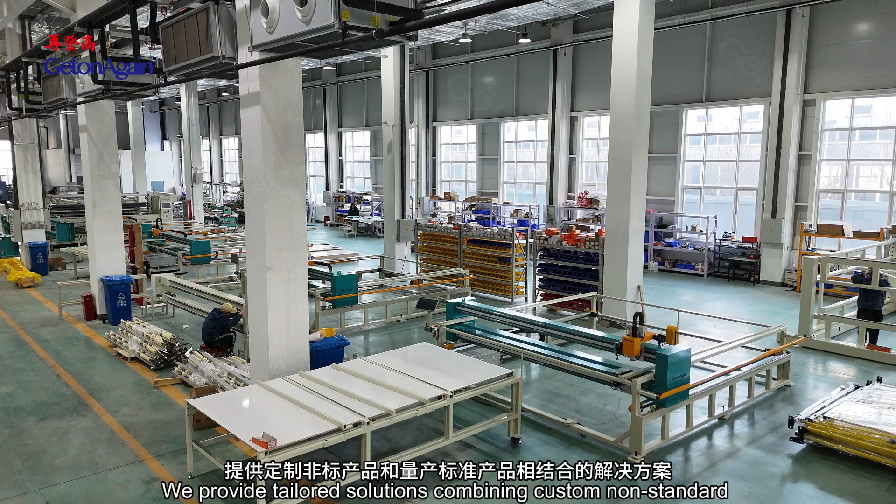We provide tailored solutions combining custom non-standard products with mass-produced standard products, including mechatronic machines, automated production lines, and intelligent factory solutions. Pattern room equipment includes magic inkjet plotter, 2 cartridge with maximum printing speed at 110 square meters per hour, 4 cartridge with maximum printing speed at 200 square meters per hour.

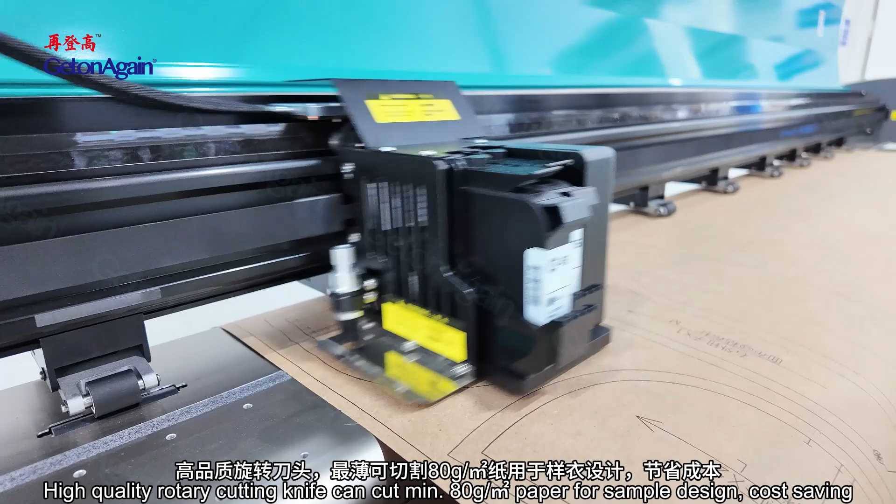Vertical inkjet cutting plotter, 1 machine multiple functions, pattern drawing with cutting, or standalone drawing. High-quality rotary cutting knife can cut minimum 80 grams per square meter paper for sample design, cost saving.

Flatbed inkjet cutting plotter, full speed map printing and cutting function, suitable for personalization, configured long knife or short knife, and optional fixed knife sleeve or elastic knife sleeve, suitable for cutting various materials.

Digitizer, easily reading paper patterns, convenient positioning, simple operation, accurately reading patterns, enable to speed up the design. It is a powerful tool for traditional manual drawing digitization.

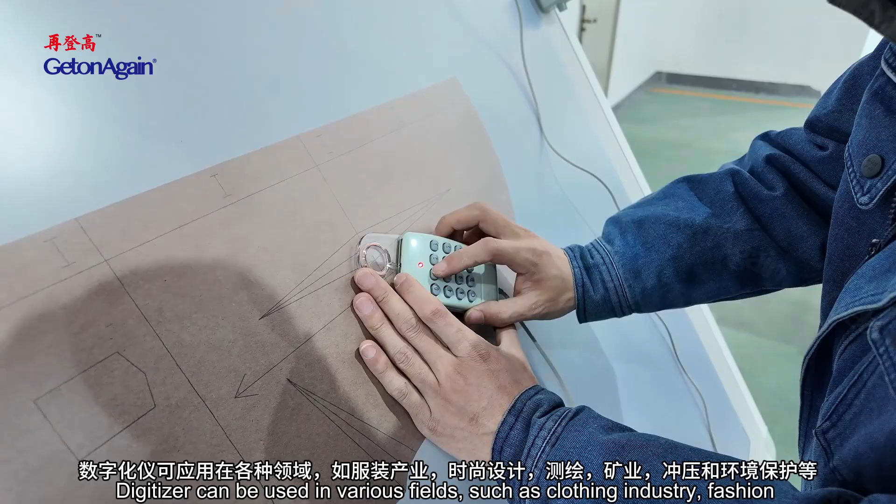Digitizer can be used in various fields, such as clothing industry, fashion design, surveying and mapping, mining, stamping and environmental protection, etc. Flatbed scanning digitizer, 1 button to start after placing scanning pieces, can vacuum absorption auto scanning auto transmission.

According to different models, support ultra-long width scanning, scanning speed up to 7,200 mm per minute, scanning resolution 150 to 300 dpi, high definition panoramic 1:1 image to ensure effective identification of various contours, notches, inner holes.

Cutting equipment includes automatic spreading machine, easily set the spreading method, length, speed, quantity and sections, with intuitive as well as simple operation. Dual use for both knit and woven fabrics, suitable for t-shirts, children's clothing, loungewear, and toy textiles.

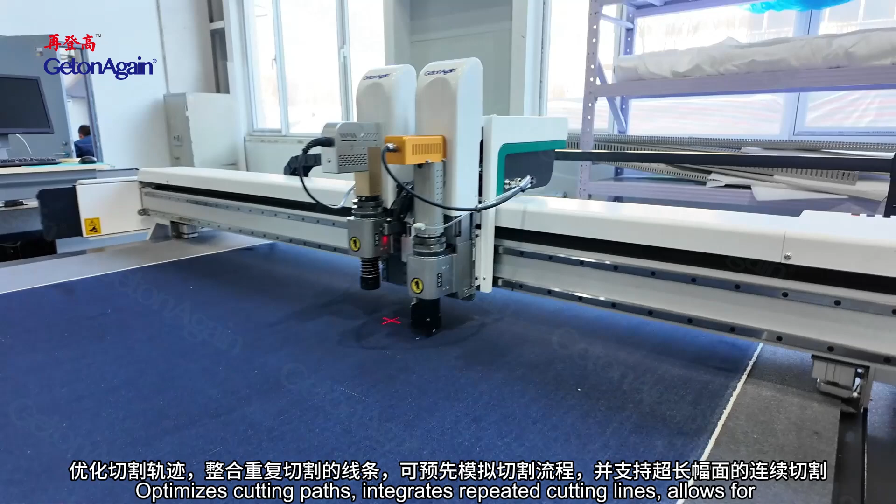Automatic single-layer cutting machine, no need to create specialized cutting molds. Cutting can be performed precisely by directly importing CAD design drawings into the equipment. Optimizes cutting paths, integrates repeated cutting lines, allows for pre-simulation of the cutting process, and supports continuous cutting for extra long materials.

Stripe and plaid matching cutting machine, equipped with a few HD industrial cameras, according to the capture size to perform intelligent combination. Ensure the high accuracy fabric images capturing.

Stripe and plaid matching auto cutter, equipped with double knives and pen draw punching working mode, special for various stripes and plaids fabric cutting in single ply.

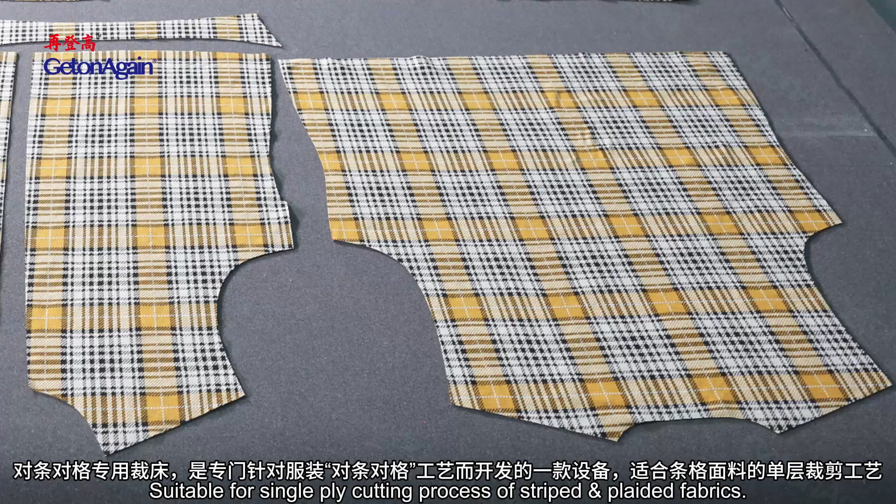High-end clothing customization: the effect of the alignment match stripe and plaid process has become the important measurement on the quality of this type of clothing. Stripe and plaid auto cutter is the equipment specially developed for this process to meet matching stripe and plaid clothing, suitable for single ply cutting process of striped and plaided fabrics.

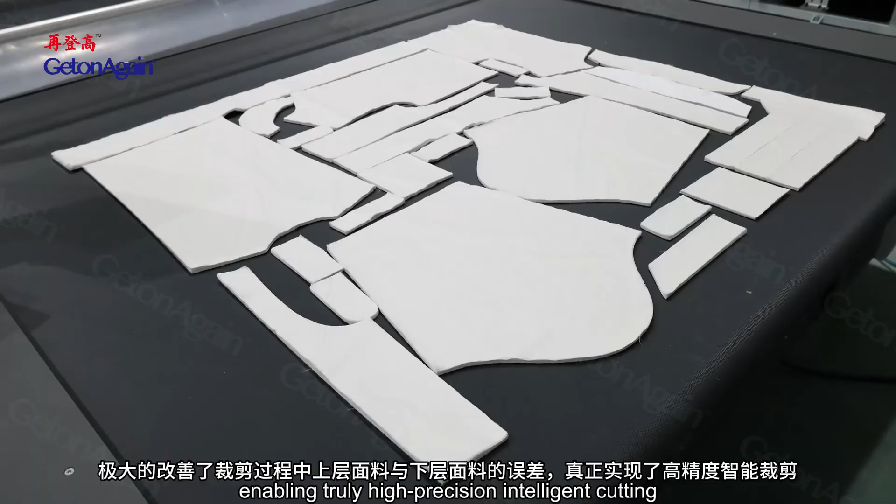Automatic multi-layer cutting machine, through the combination of micron-level intelligent sensing components and an intelligent control system, dynamic compensation and correction of cutter deformation during cutting operations are achieved, significantly reduces errors between the top and bottom layers of fabric during cutting, enabling truly high-precision intelligent cutting.

Computerized embroidery machine, high-speed embroidery with extremely low failure rates, long service life, low noise, and stable, reliable quality, equipped with an upper thread clamping device to prevent thread detachment and breakage, ensuring excellent embroidery results. Suitable for textile and garment manufacturing, footwear, hats, bags, home decoration, automotive interiors, and industrial products area.

Embroidery equipment includes Cloud Smart Teaching Embroidery Machine, suitable for integrated theoretical and practical teaching of computer embroidery in fields such as fashion and apparel design, clothing design and its engineering.

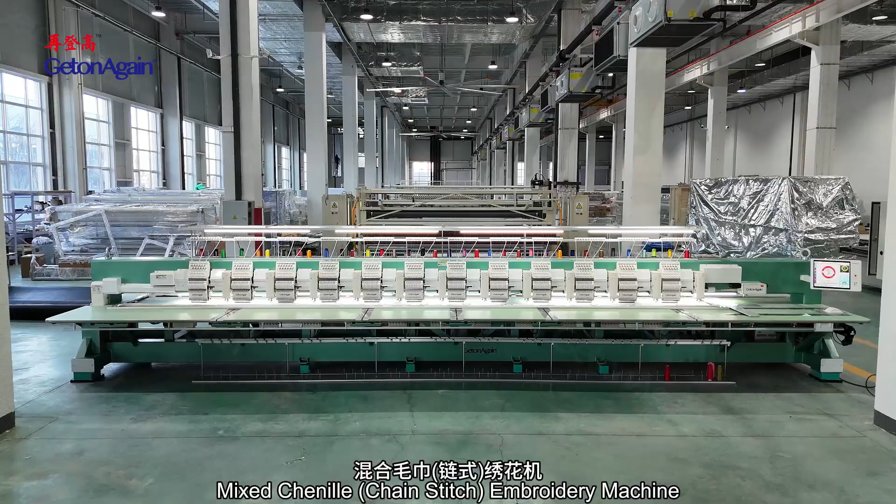Mixed chenille chain stitch embroidery machine, mixed embroidery feature, according to color sequence settings, switchable between chenille embroidery, flat embroidery, simplified operation. Chenille needle height can be adjusted for 10 levels according to chenille pile height or chain stitch thread thickness.

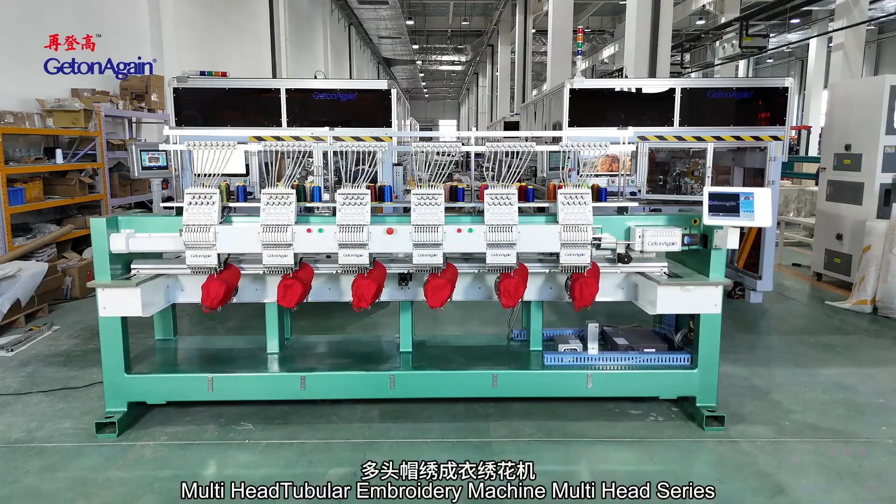Multifunctional embroidery on garment, shoes, caps, home textile, toys, bags and luggage, art craft, etc. Multi-head tubular embroidery machine multi-head series, suitable for embroidering on flat, caps, garments, shoes, belts, bags, etc.

Auto thread trimmers, auto color change, auto thread break detection, 270 degrees wide angle cap system, red light locating, LED lighting, precise head and drive system to ensure exquisite embroidery work.

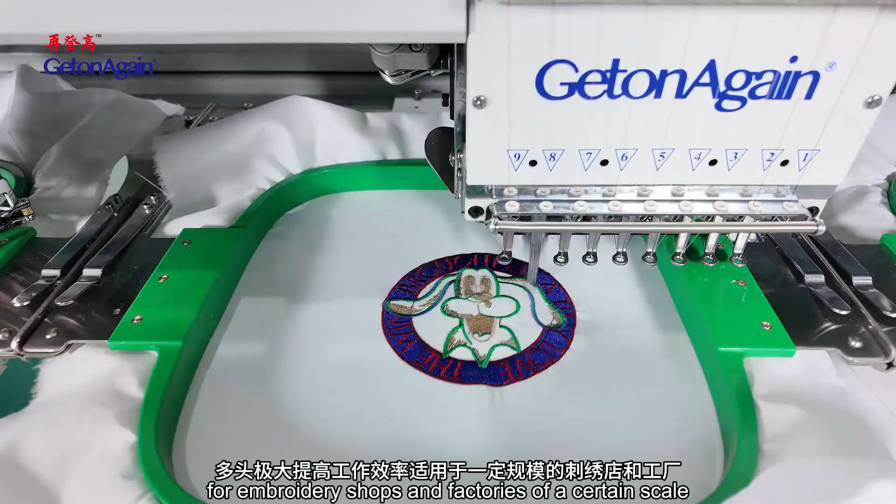Drop tables, easy to lift up and down. Multiple heads greatly improves work efficiency, suitable for embroidery shops and factories of a certain scale.

Computerized 5-in-1 embroidery machine, integrated 5 functions in one machine: flat embroidery, coiling, tape cording embroidery, chenille, chain stitch embroidery, double sequin device, laser cutting function, high precision, strong stereo sense, ideal artistic effect, suitable for embroidery of apparel, home textile, furniture, teaching, design and arts and crafts, etc.

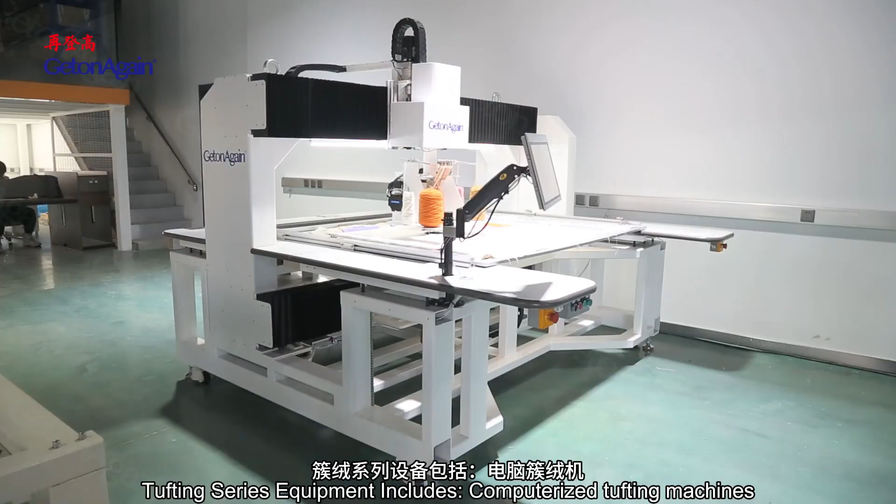Tufting series equipment includes computerized tufting machines with rotary tufting heads that work at any angle, avoiding positive-negative stitching differences, for higher efficiency and better tufting results. Suitable for various rugs, carpets, hanging carpets, tapestry, and other flooring decorative and home furnishing products tufting.

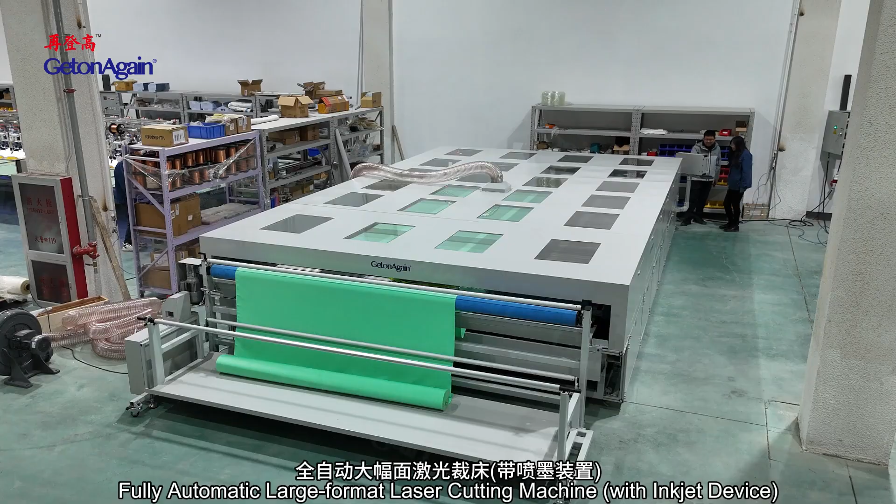Fully automatic large format laser cutting machine with inkjet device. Large format automatic feeding system designed to meet requirements for feeding and cutting whole rolls of fabric. Inkjet and cutting functions integrated for enhanced versatility. Applicable to industries such as custom clothing, single-piece cutting, sofas, toys, footwear and headwear, textile print pattern positioning cutting, automotive interiors, industrial filtration, and advertising, etc.

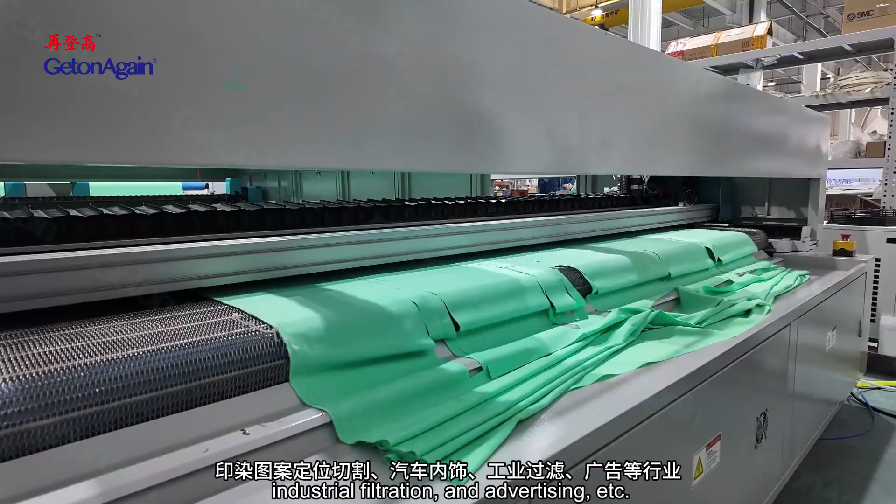Sewing equipment includes an automatic arbitrary rotary single needle leather sewing machine, suitable for automated leather pattern sewing in the fields of automotive interiors, car seat covers, car door panels, airplane seats, and leather furniture upholstery.

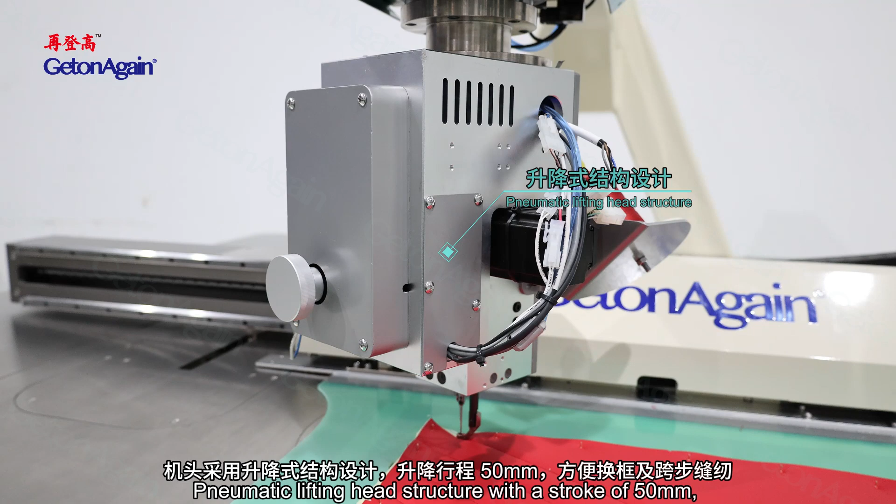Brand new integrated sewing head design with a simple and elegant overall appearance. 15-inch HD industrial touch control screen. Two sides workbenches designed with a flexible mechanism, reducing size after folding for easier transportation. Sewing head can rotate at any angle, avoiding differences between forward and reverse stitches, improving sewing efficiency and stitch quality. Pneumatic lifting head structure with a stroke of 50mm, making frame changes and span sewing more convenient.

The advantage of an independently driven presser foot system lies in its ability to control presser foot height through real-time pattern programming, effectively addressing uneven presser foot pressure issues when sewing materials of varying thicknesses. Newly upgraded triple lead screw drive for higher dynamic positioning accuracy. Max speed holds at 2,500 stitches per minute.

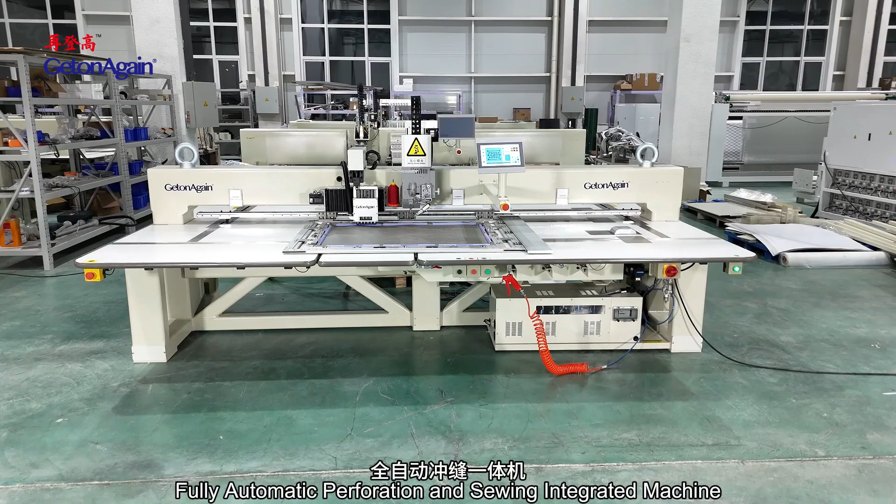Fully automatic perforation and sewing integrated machine. The punching machine head is specifically designed and developed for leather materials, equipped with various punching tool specifications. Sewing head up moving stroke is 50mm, providing sufficient space for material loading and easy operation. Suitable for perforation and sewing processes of various types and thicknesses of genuine leather and microfiber leather used in car seats, automotive interiors, aircraft seats, luggage, furniture, and more.

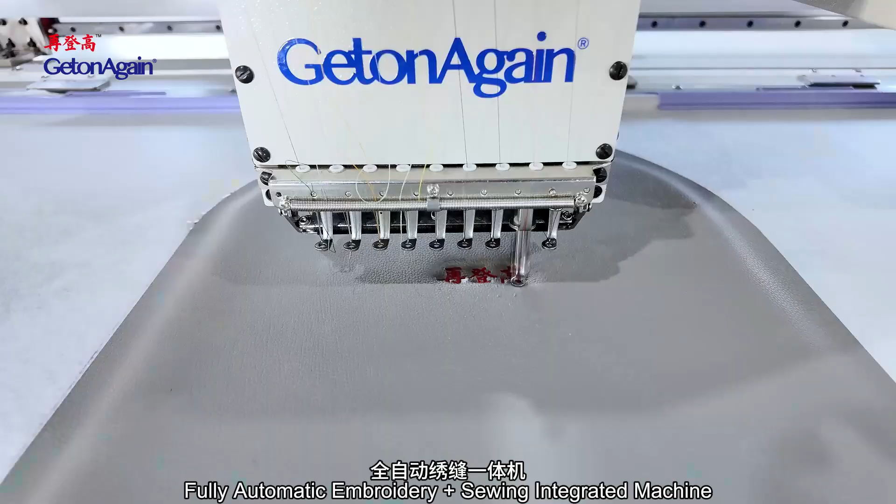Fully automatic embroidery and sewing integrated machine. 9-color embroidery machine head to meet the embroidery needs of different industries. The embroidery thread clamping mechanism incorporates a novel upper thread clamping assembly, effectively reducing thread breakage and slippage occurrences during operation. Specially designed sewing machine head for leather materials, producing beautiful stitching.

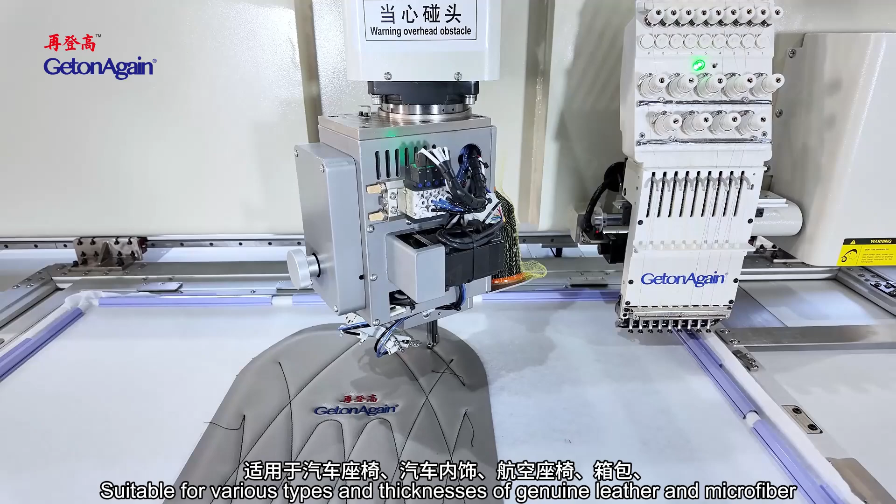Presser foot height is motor controlled and highly adjustable. Sewing machine head has an up-down moving stroke of 50mm, providing ample space for material loading and ease of operation. Suitable for various types and thicknesses of genuine leather and microfiber leather for automotive seats, car interiors, aviation seats, luggage, furniture, etc., combining embroidery and sewing processes.

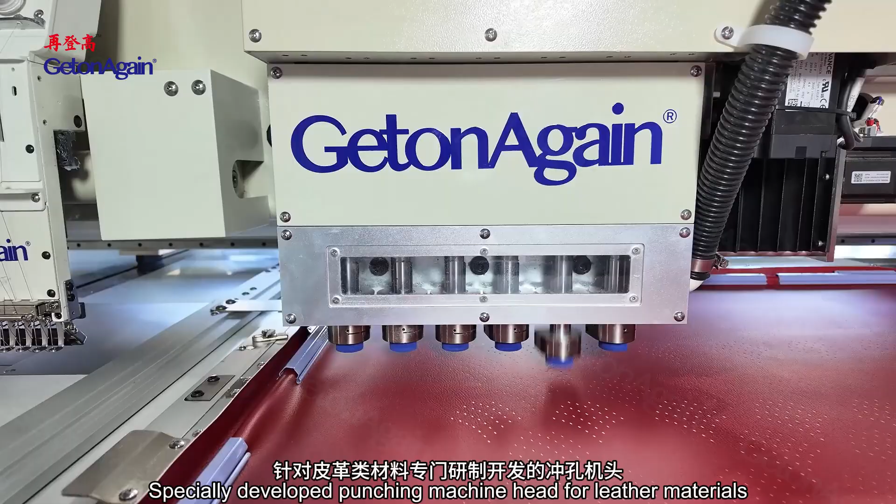Fully automatic perforation special hole and embroidery and sewing rotating head machine. Integrates punching, embroidery, and sewing into one machine, allowing for arbitrary pattern design and seamless combinations of punching, embroidery, and sewing for complex processes. Specially developed punching machine head for leather materials. The 9-color embroidery head meets the embroidery needs of various industries. Sewing machine head features an arbitrary rotation structure, creating beautiful stitching, reducing frame movement frequency, and improving efficiency.

Suitable for punching, embroidering, and sewing processes for various types and thicknesses of genuine leather and microfiber leather used in automotive seats, car interiors, aviation seats, luggage, and furniture, etc.

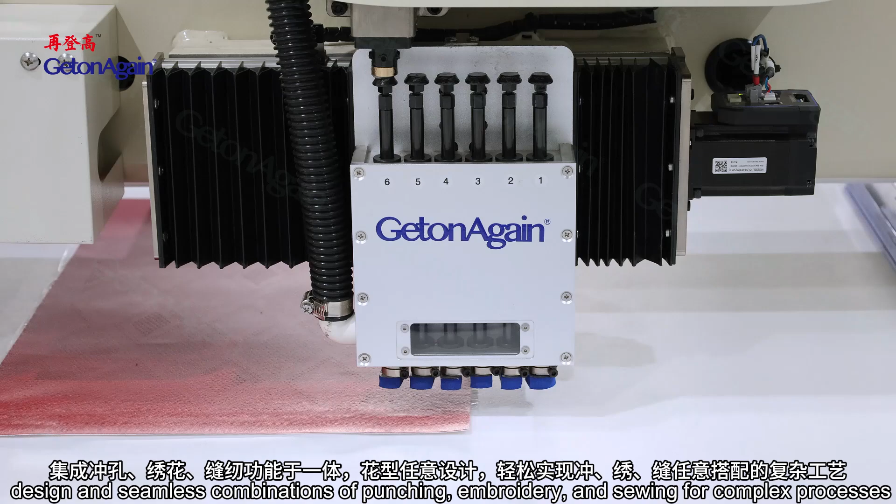Fully automatic perforation round hole embroidery sewing rotating head machine integrates punching, embroidery, and sewing into one machine, allowing for arbitrary pattern design and seamless combinations of punching, embroidery, and sewing for complex processes. The 9-color embroidery head meets the embroidery needs of various industries. Sewing machine head features an arbitrary rotation structure, creating beautiful stitching, reducing frame movement frequency, and improving efficiency.

Suitable for punching, embroidering, and sewing processes for various types and thicknesses of genuine leather and microfiber leather used in automotive seats, car interiors, aviation seats, luggage, and furniture, etc.

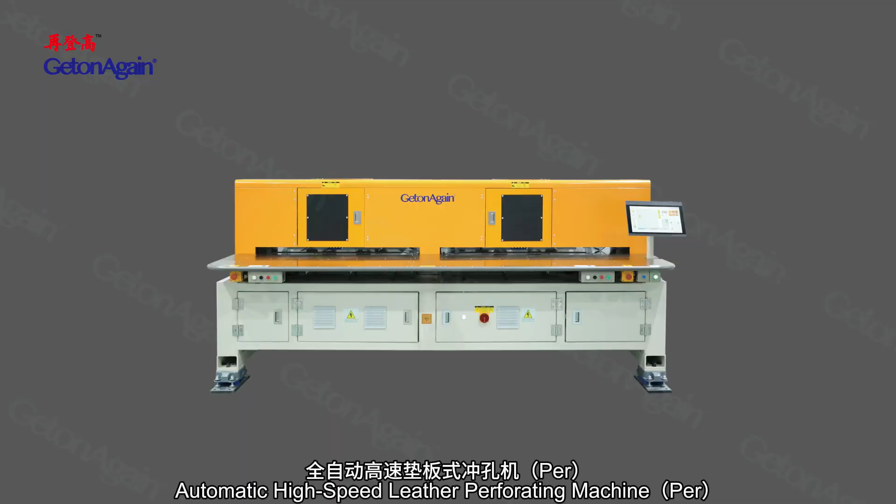Automatic high-speed leather perforating machine for punching processing of leather or microfiber leather with various types and different thickness, such as car seats, aviation seats, shoes, bags and furniture, etc. Full-scale 3-dimensional protective design ensures safer operation. The punch toolbox is heightened to prolong the punch tool's spring service life and reduce part wear.

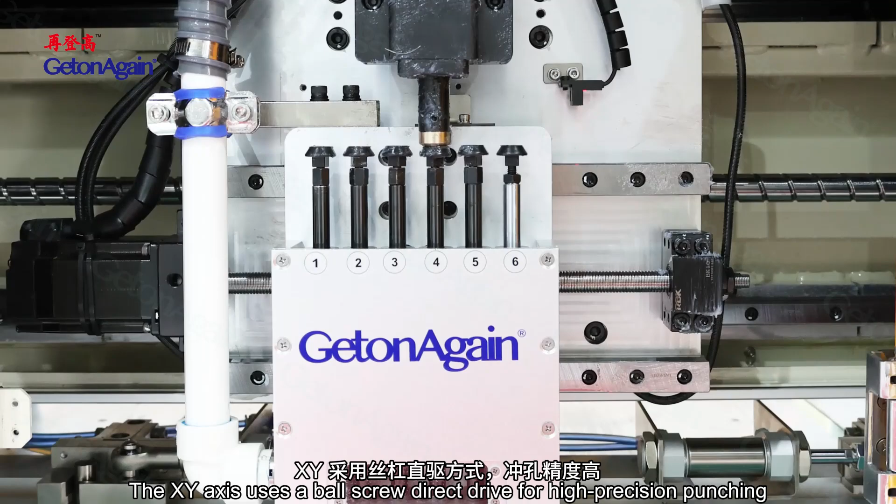The XY axis uses a ball screw direct drive for high-precision punching. The surface of key punching parts is strengthened to resist impact and fatigue, meeting the needs of high-intensity work. Single-head machines can make up to 2000 punches per minute, and double-head ones up to 4000.

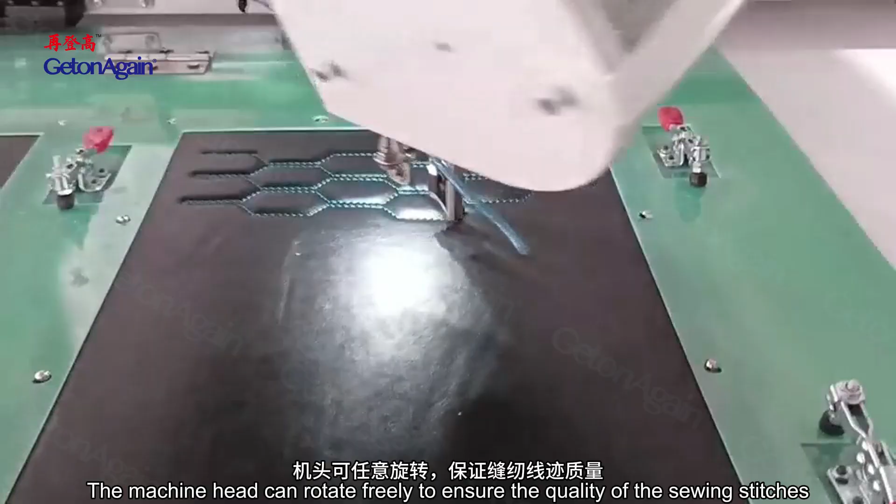Automatic template sewing machine, rotary head, for heavy material. Both the X and Y axis use a screw and slide transmission method, providing high precision and good stability. Suitable for pattern sewing on leather and heavy materials, such as car seats, sofas, massage chairs, boat interiors, and aircraft seats. The machine head can rotate freely to ensure the quality of the sewing stitches.

Automatic template sewing machine with double belt, double guide rail, double stepper motor structure. The machine head adopts oil-free lubrication, and the rotary shuttle adopts oil-line lubrication technology to completely eliminate fabric pollution. It identifies patterns through RFID barcodes and automatically switches to the corresponding sewing program for quick sewing. Used for template sewing processes such as opening pockets, notches, bag covers, and collar trimming.

Pattern sewing machine. This machine can easily sew 1200D thick thread with a thickness of 12 mm, features a 2 times large rotary hook, automatic thread trimming, and a maximum sewing speed of up to 2500 RPM.

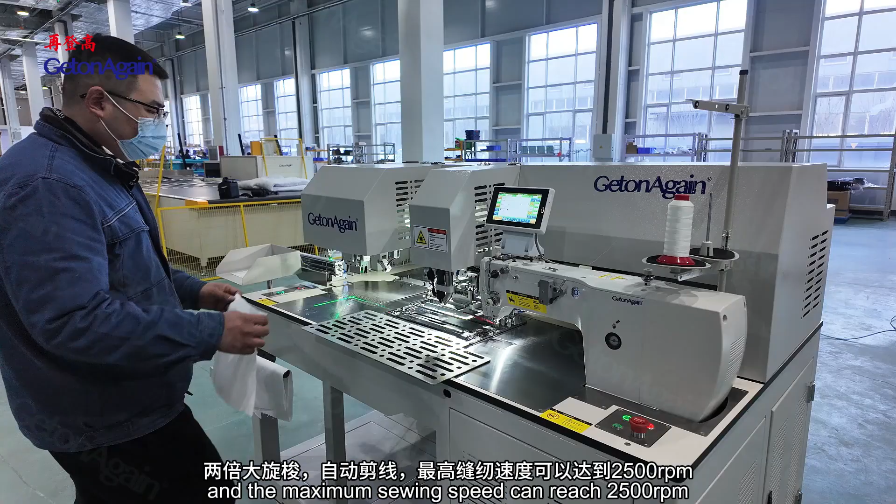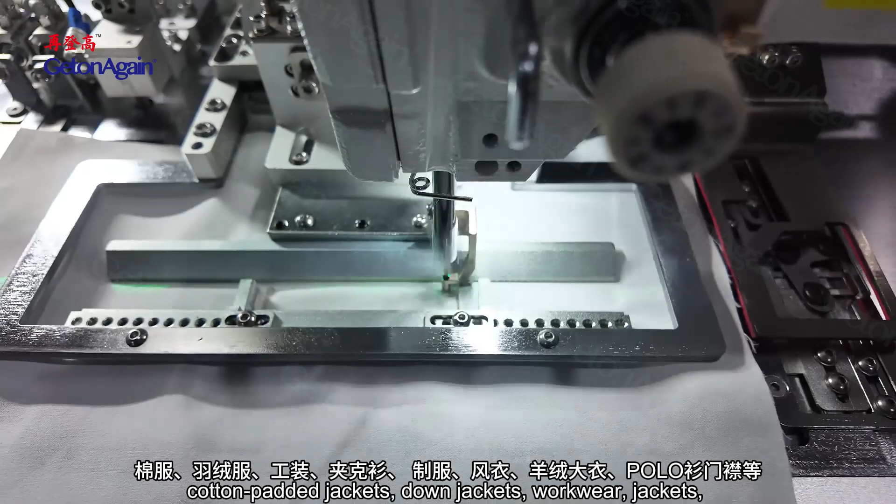Automatic laser pocket opening machine: automatic ironing-free pocket folding, automatic material feeding, laser pocket opening, automatic sewing, automatic thread trimming, and automatic material collection. Used for front and back pockets of men's and women's clothing, suits, inner and outer pockets of jackets, dress pants, hoodies, sun protection clothing, school uniforms, sportswear, cotton padded jackets, down jackets, workwear, jackets, uniforms, trench coats, cashmere coats, and plackets for polo shirts.

Quilt edge binding machine, featuring single needle compound feed, achieving cutting, binding, and sewing in one seamless operation. An enlarged right side waste discharge port with pneumatic waste discharge assistance ensures smoother disposal of waste generated during edge cutting. A special synchronized feeding structure, including alternating presser foot, needle, feed dog, and binding attachment, ensures no wrinkles or misalignment during straight line or corner sewing for a flawless binding effect.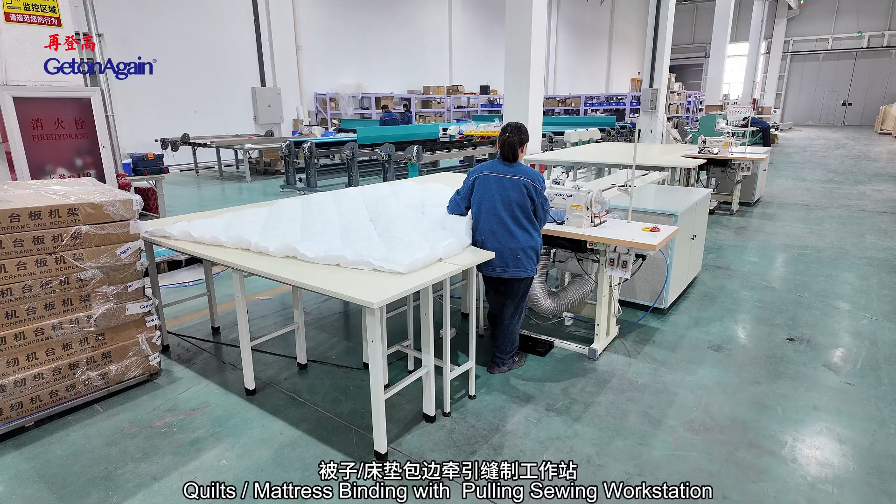Designed for edge binding processes of quilts such as cotton quilts, summer quilts, spring and autumn quilts, and other bedding items. Quilt and mattress binding with pulling sewing workstation.

Equipment factory standard provides an air floating table and automatic pulling device, making sewing worker operation easier and smoother. Equipped with PLC control pulling device synchronized with sewing machine electronic control, these two machines work at the same speed and synchronized direction.

Optional automatic storage and vacuuming device improves efficiency, reduces dust emissions, and provides the sewing operator a clean and tidy working environment. Binding result is rich and strong with a solid feel. Corners are smooth and nice, stitch lengths are evenly distributed, with no hairy edge, no edge folding, and no corner raising or other negative symptoms.

Automatic mattress protector skirting sewing machine, interlock and overlock. Suitable for processing fitted sheets, all in one to finish binding stitching of elastic rope cord and bed skirt, and the overlocking of bed skirt to mattress protector topper layer.

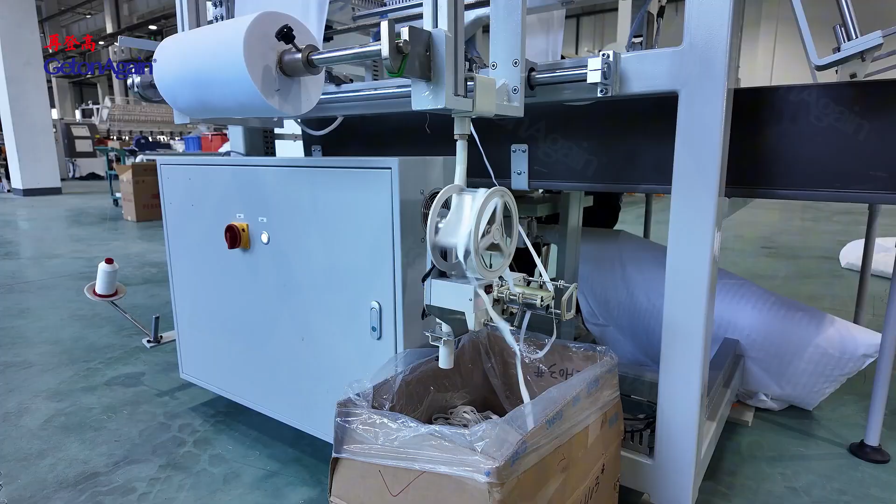Multi-hole bar tacking machine. Press arm and sewing frame work synchronously to ensure high precision bar tacking. Suitable for chair pad, cushion and pillow, all those with fillings, and for bar tacking requirements for reinforcing sewing work.

Long arm label sewing machine, adopting connecting rod thread pickup. Large rotary hook, with the needle bar swinging up and down while feeding simultaneously, forming zigzag lock stitch. Reasonable swing mechanism makes switching between zigzag sewing and normal lock stitch easy and free. The upper and lower synchronous feeding structure makes it easy to operate, with good sewing effect and beautiful stitches.

Mattress flanging machine, equipped with a Juki machine head from Japan and a double bar twin needle design. It easily switches between thick and thin fabric sewing. Flanging thickness 10 mm to 70 mm. Max speed 3000 RPM. Flanging width 25 mm.

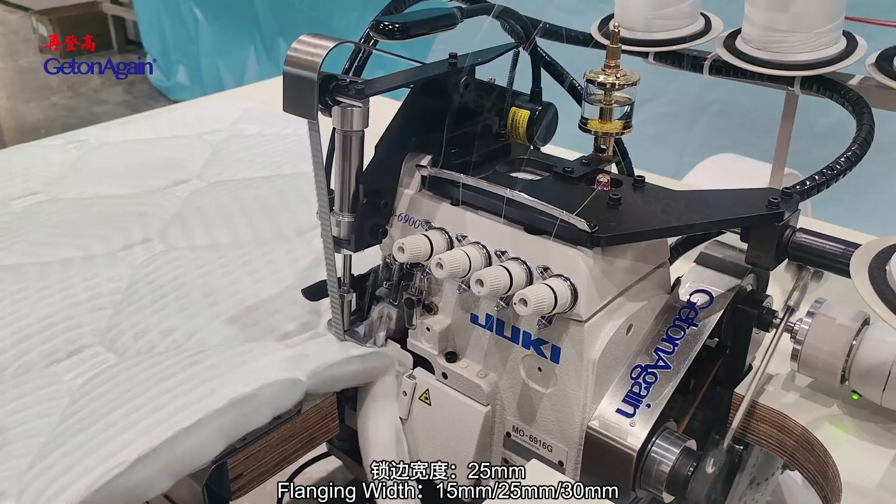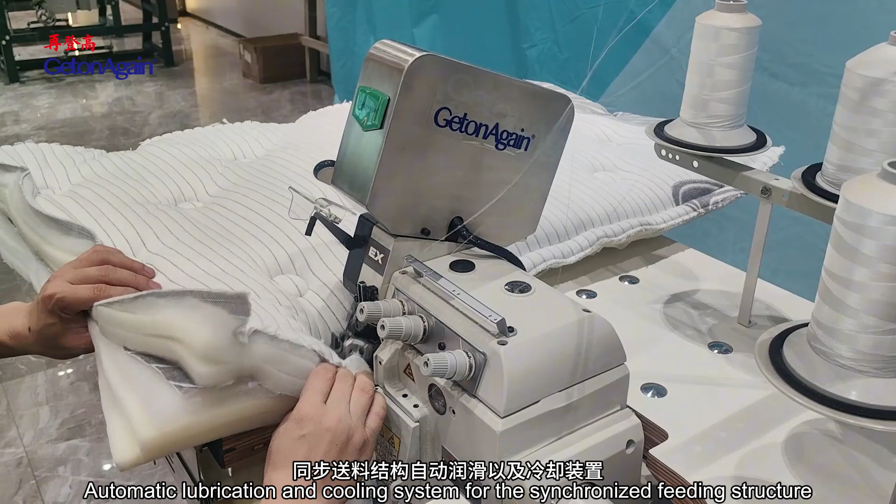High-speed mattress flanging machine, effortless switching between thick and thin fabric sewing. Synchronized feeding presser foot structure provides excellent feeding capability, enabling ultra-thick fabrics that standard machine heads cannot sew to pass through smoothly. Flanging thickness 10 to 90 mm, with automatic lubrication and cooling system for the synchronized feeding structure. Max speed 4000 RPM. Flanging width 15 mm, 25 mm, or 30 mm.

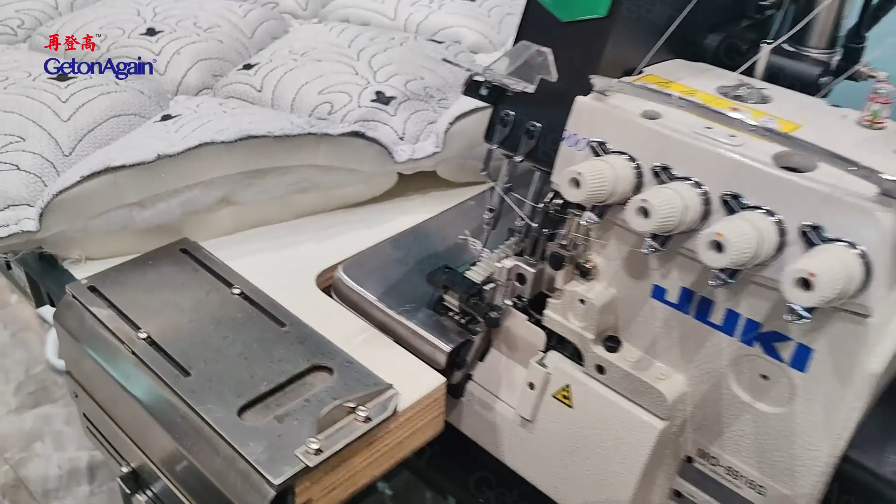Heavy-duty mattress flanging machine. Innovative drive mechanism ensures more convenient and powerful sewing performance. Adjustable stitch length of 4.5 to 6 stitches per inch. Easily switches between thick and thin fabrics sewing. Capable of overlocking extra thick mattress fabrics ranging from 10 mm to 90 mm. Maximum sewing speed reaches up to 4,500 stitches per minute. Overlocking width is 25 mm.

Computerized synchronized hot cutting binding machine. Designed for products requiring binding processes, it is equipped with a standard pneumatic hot cutter. The binding tape no longer requires manual cutting. Simply press a button to complete precise cutting. The hot cutting edges are clean, with no fraying or loose threads, significantly improving production efficiency.

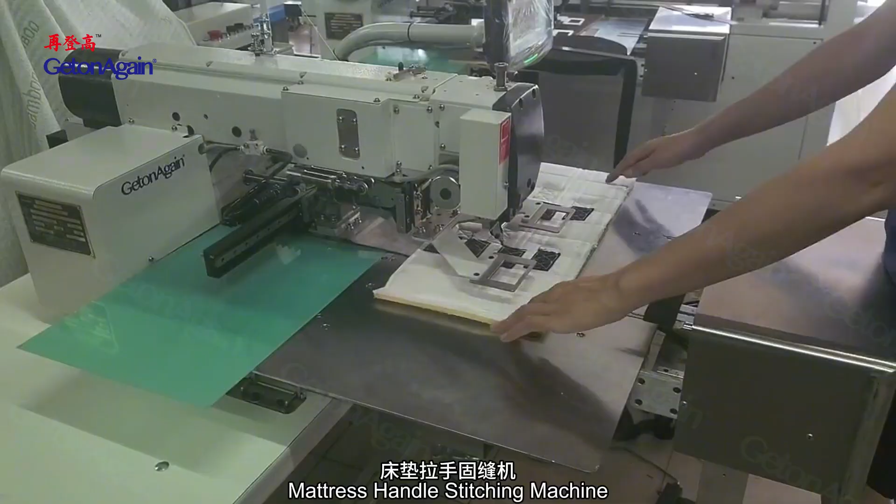Mattress handle stitching machine. Fully automatic operation, controlled via touch screen. Customized stitching patterns is possible, significantly improving production efficiency. Easy to operate, precise positioning.

Semi-automatic mattress tape edge machine. Primarily designed for sewing spring mattresses, this machine efficiently completes edge overlocking between mattress fabric and sidewall fabric. It is also suitable for sewing other types of mattresses and sofa cushions. Key features include an electrically adjustable work table with high strength, independent support, ensuring exceptional stability during operation.

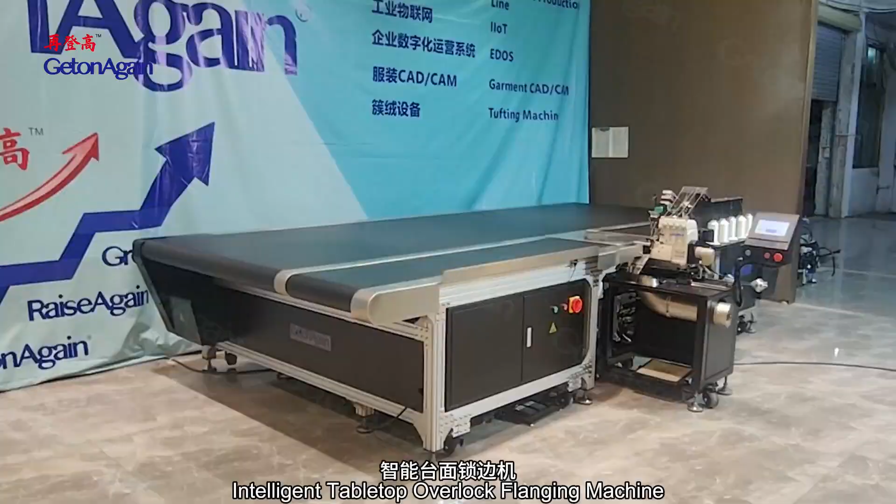Intelligent tabletop overlock flanging machine. Equipped with a modified Juki thick material overlock machine head. Newly designed ultra-high lifting presser foot with a lifting height of 35 mm. Machine head can move, making threading and daily cleaning more convenient. Flanging thickness 10 mm to 80 mm. Easily switches between thick and thin fabrics sewing.

Auto flip tape edge machine. Automated transfer table and mattress turnover arm enable the operator working in one position without moving around. Variable speed drive automatically slows down on turning corner. The machine head can rotate freely to ensure the quality of the sewing stitches. When ready to sew the opposite side, the turnover arm unit flips the mattress automatically. Machine head height and inclination are adjustable.

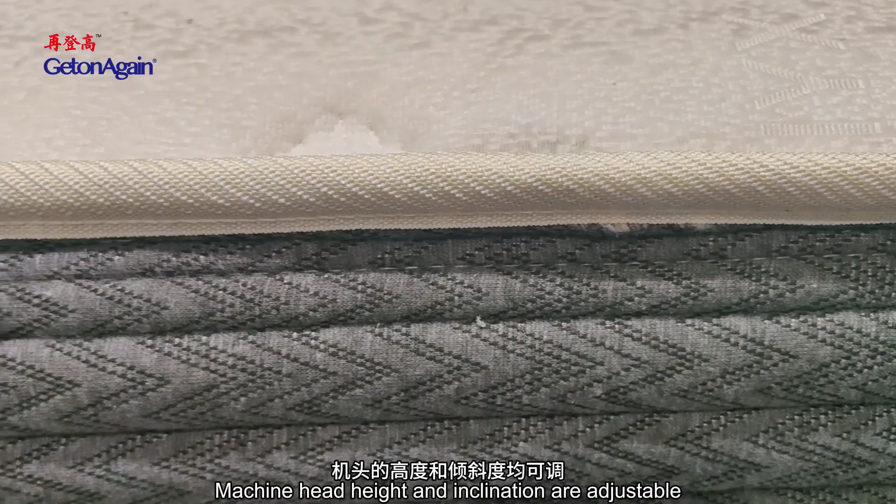Industrial sewing machines include various overlock and lock stitch machines. Flat tape edge machine, mainly used for stitching between mattress fabric and side border. Suitable for sewing other soft mattresses, bedding, sleeping bags, and tents. Stable performance, little vibration, low noise, and high efficiency.

Long arm repairing machine. This machine is mainly used for the applique work of mattress crepe fabric. The upper and lower shafts of the machine are of integral structure, and the servo motor of Taiwan is used to automatically position the needle. The new presser foot is equipped with a needle bar lifting device to make the thick fabric complement more convenient and beautiful.

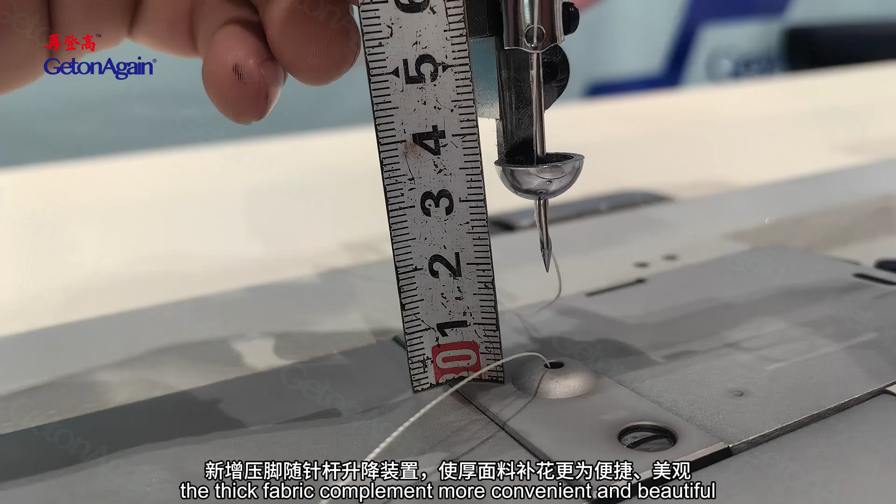Quilting equipment includes computerized multi-head rotary hook quilting machine model and double row lock stitch multi-head quilter with large rotary hook. Max speed of 1,500 RPM, more than 2 to 3 times that of normal shuttle quilting machines, greatly improving work efficiency. 3-fold capacity rotary hook, less bobbin changing frequency, beautiful stitches, no lost stitch, no thread loops.

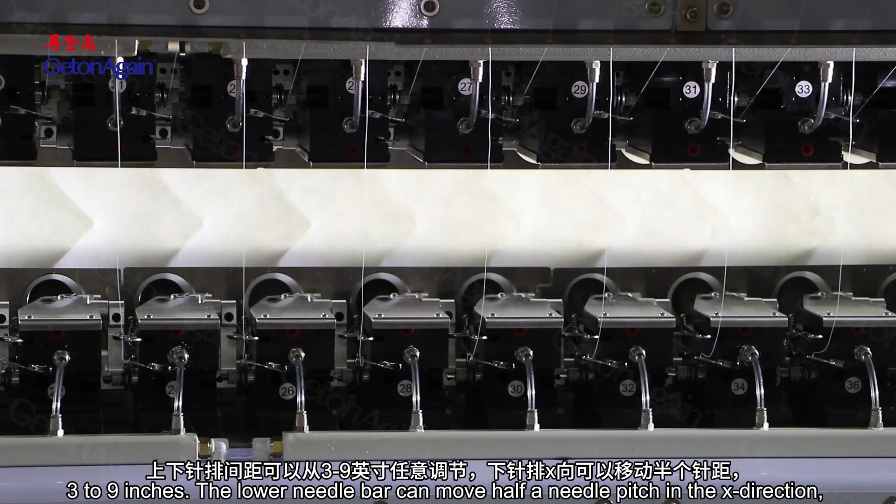Computerized multi-head rotary hook quilting machine Model E, with 5-time jumbo rotary hook, less bobbin changing frequency, beautiful stitches, no lost stitch, no thread loops. The interval between the upper and lower needle bars can be adjusted to any value from 3 to 9 inches. The lower needle bar can move half a needle pitch in the X direction, so that quilting needle bars of different sizes and patterns can be combined.

Especially for some non-standard size patterns, which can achieve a unique effect. Computerized multi-needle shuttle quilting machine, Flying Shuttle, for quilting of fitted sheets, bed covers, summer quilts, and clothing products with quilting patterns.

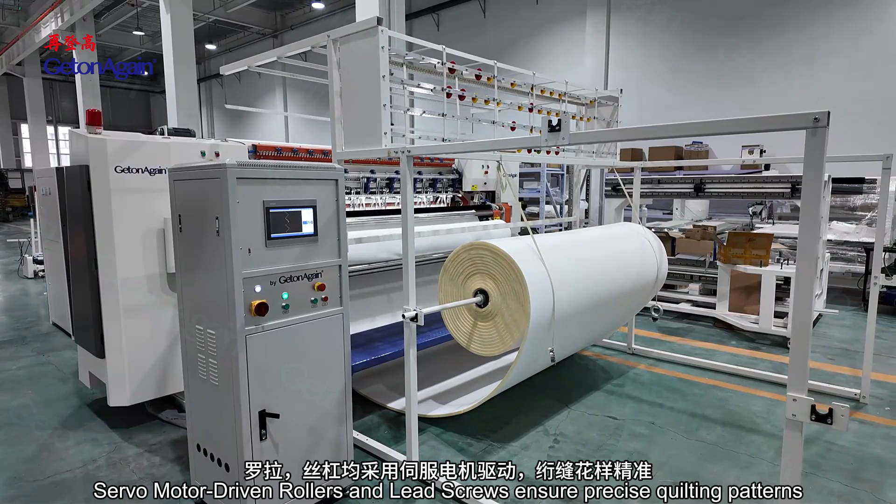Computerized multi-needle chain stitch quilting machine, servo motor-driven rollers and lead screws ensure precise quilting patterns, suitable for mattresses, mattress covers, sofas, bedding, home textiles, and home decor.

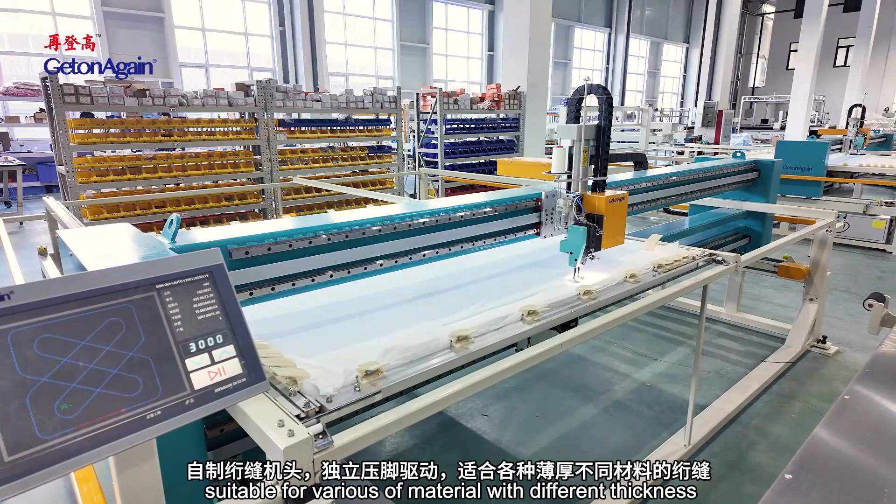Computerized single-needle quilting machine lifting head. The extendable quilting frame can be freely adjusted according to required size. GetonAgain quilting head, independent presser foot drive, suitable for various materials with different thickness. Full servo motor control, providing powerful and accurate driving force. Automatic lifting head, easily change the frame after finishing quilting. New quick frame changer optional. Quilting process for home textile products such as quilts, comforters, mattress protectors, blankets, sleeping bags, single needle art quilts, etc.

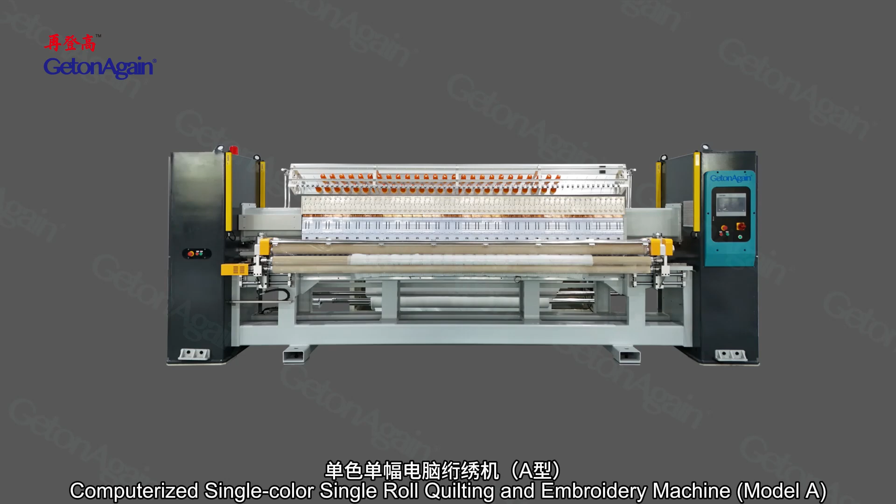Computerized single color single roll quilting and embroidery machine Model A, for summer quilts, bedspreads, mattress protectors, pillowcases, blankets, garments, car seat covers, car floor mats and furniture upholstery, etc. Equipped with a new high-speed double needle quilting and embroidery machine head with surface coating treatment for parts. Maximum speed 1000 rpm, recommended operating speed 750 to 850 rpm.

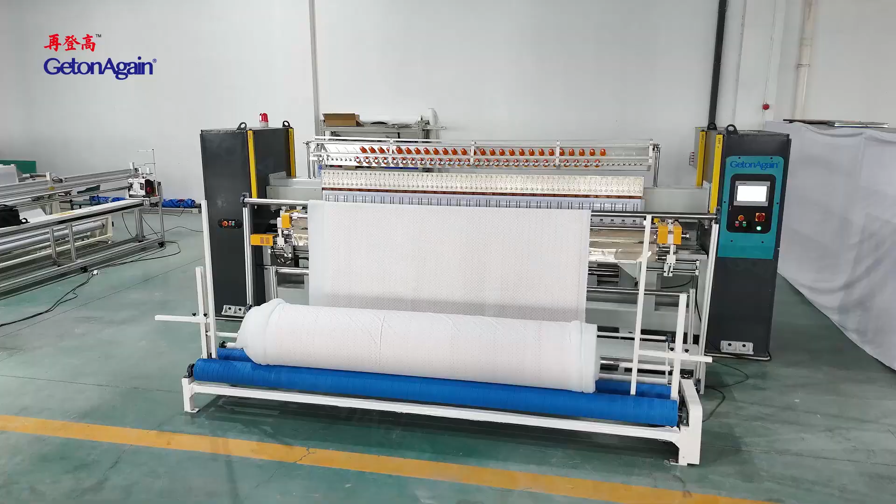Ultrasonic equipment includes the ultrasonic slitting machine, which adopts ultrasonic cutting technology to ensure smooth cutting edges, precision edge cutting, and no deformation, free without fraying, no fiber pull, and no edge curling problem after cutting. Cutting rollers and patterns can be customized to meet various needs.

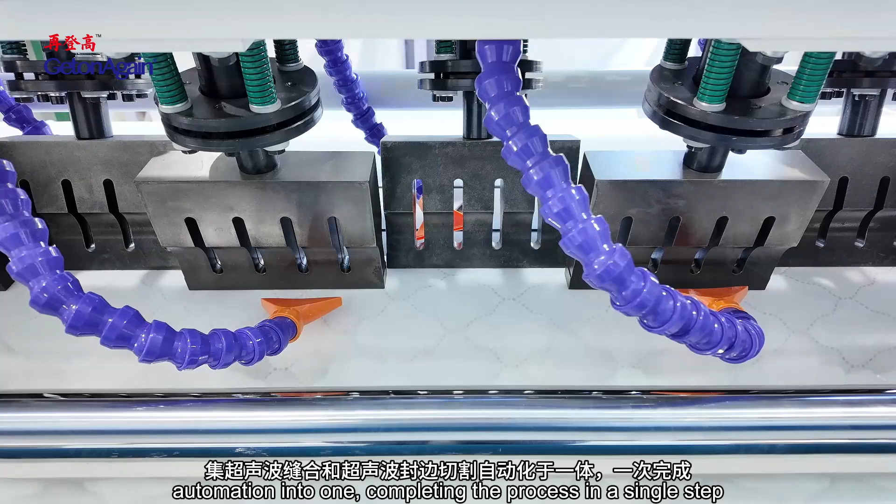The automatic ultrasonic quilting machine integrates ultrasonic sewing and ultrasonic edge sealing and cutting automation into one, completing the process in a single step. The latest structure design with interleaved transducers ensures embossing that is seamless and wrinkle-free.

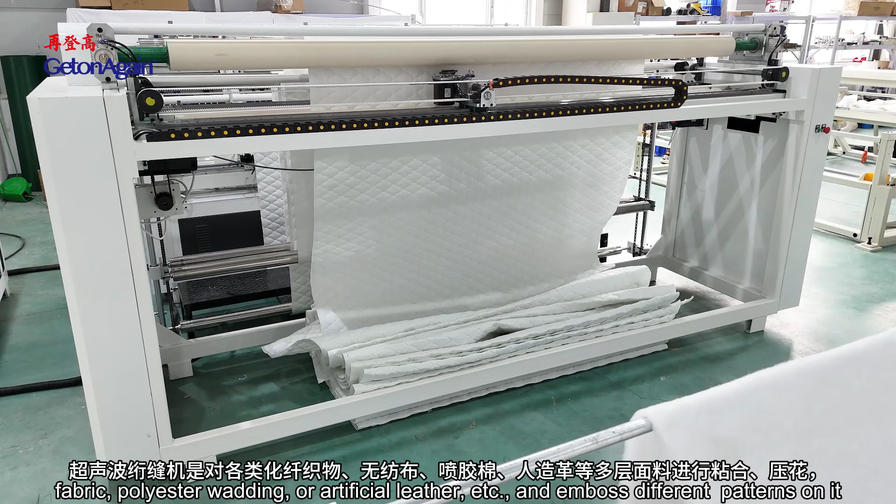After quilting, it can be connected with a cutting machine for finished products, or connected with a rewinding device for fabric rolls. The ultrasonic quilting machine bonds multiple layers of polyester fabric, non-woven fabric, polyester wadding, or artificial leather, and embosses different patterns on it. Patterns are clear and beautiful, fabric doesn't deform, with strong bonding and high efficiency.

Ultrasonic lace machine, ultra-high power output with adjustable power to meet the welding and cutting requirements of different materials and thicknesses. Mold size ranges from 23 to 60 millimeters.

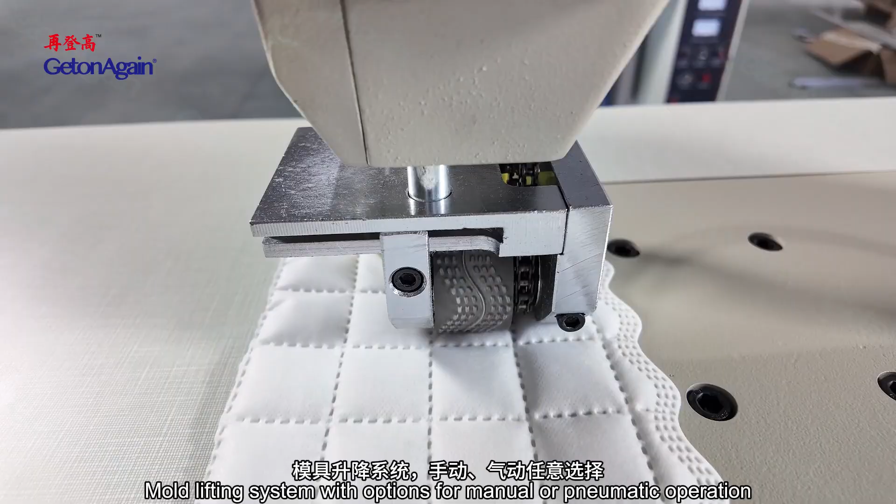Mold lifting system with options for manual or pneumatic operation. Stripping simultaneous single or multi-strip cutting with edge melting treatment for clean, burr-free edges. Pattern molds and welding heads undergo special hardness treatment for higher wear resistance. Various patterns can be customized as needed.

The cut work lace machine cuts various patterned holes with edge melting treatment, high running speed, and simple operation. Bonding seamlessly fuses two or more layers of fabric together without thread or needles, ensuring strong welding strength.

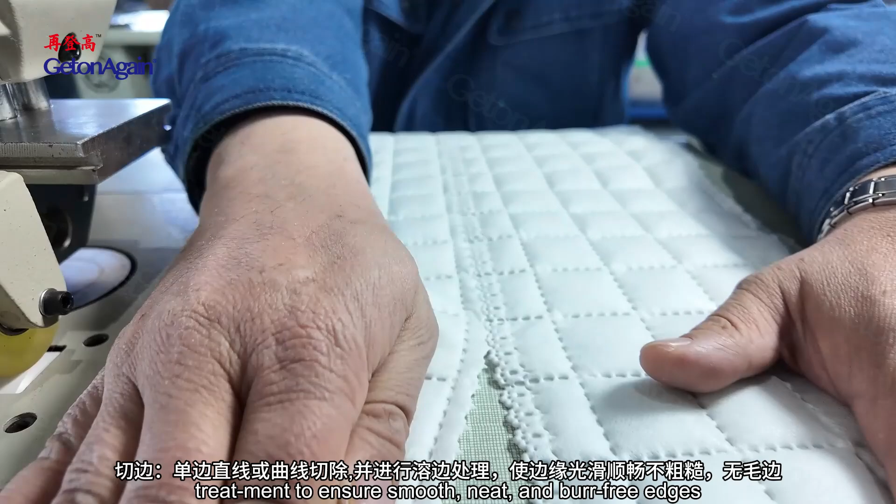Forming process combines cutting, bonding, and embossing in a single reduced forming step. Edge cutting handles straight or curved single edge cutting with edge melting treatment to ensure smooth, neat, burr-free edges. Suitable for lace, decorative ribbons, home textile products, umbrella lace, tablecloths, automotive interiors, non-woven shopping bags, carbon bags, eyeglass cloth, etc.

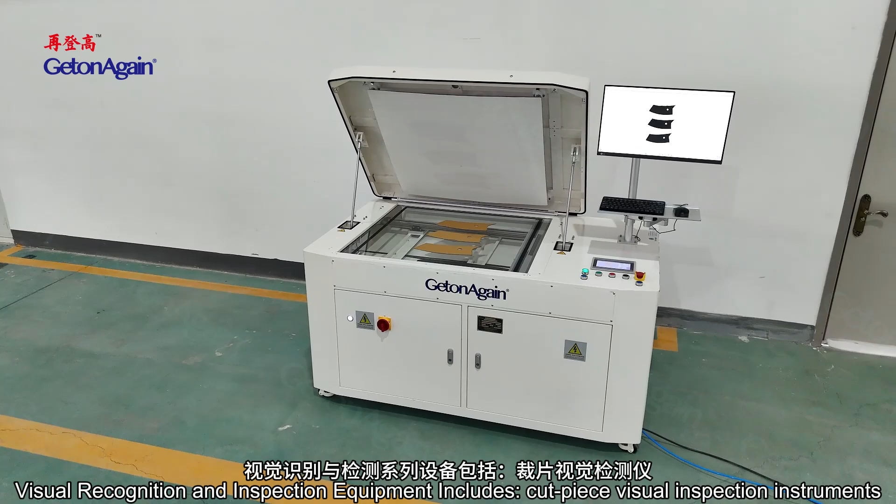Visual recognition and inspection equipment includes cut piece visual inspection instruments. After manual placement, one-click start allows for automatic scanning, automatic inspection of cut pieces, and automatic data storage.

Scanning speed can reach up to 120 millimeters per second, with no need for additional lighting, ensuring reliable use in all weather conditions. Scanning resolution is 150 to 300 dpi, and the high-definition panoramic 1:1 image ensures that the inner and outer contours of the cut pieces are clearly visible.

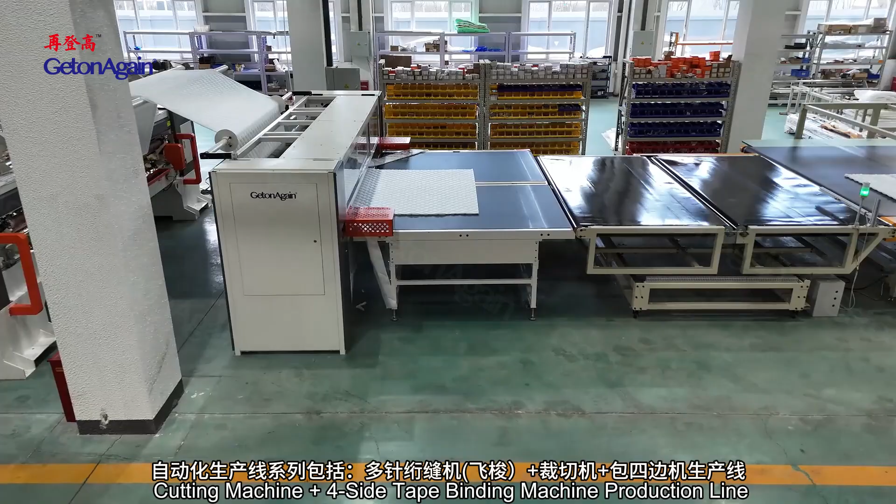The automated production line series includes the multi-needle quilting machine, Flying Shuttle, cutting machine, and the 4-side tape binding machine production line.

Multi-needle quilting machine: the raw materials are quilted and fixed with lock stitches, mainly used to process quilted cores and cushions.

Cutting machine: cuts the quilted semi-finished materials, including trimming, fixed length cutting, slitting, and rolling, among other functions.

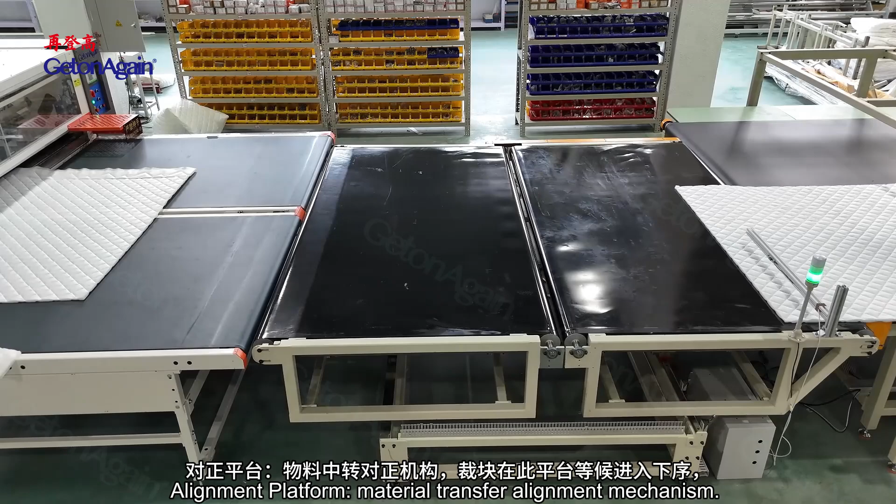Alignment platform: a material transfer alignment mechanism. The cutting block waits to enter the next sequence on this platform, and at the same time the cutting block is aligned with the subsequent reference processing position by translation.

Automatic tape binding machine: the cutting piece is processed by the tape binding machine to make the edge of the cut piece beautiful, using a machine rounded corner tape binding process. The cutting and tape binding are integrated, and all actions are completed automatically.

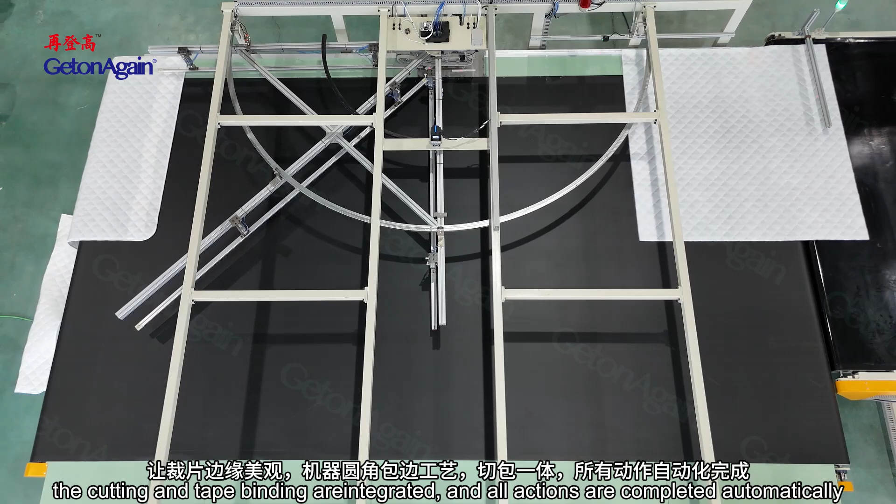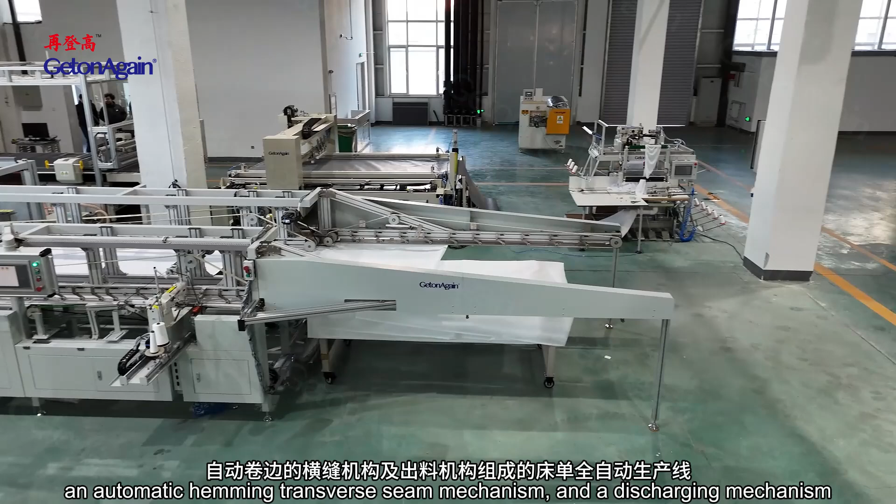Automatic bed sheet production line: a fully automated bed sheet production line composed of a feeding mechanism, an adjustable width longitudinal sewing mechanism, a fixed length transverse cutting mechanism, an automatic transverse conveying mechanism, an automatic hemming transverse seam mechanism, and a discharging mechanism.

Automatic blanket straight corner binding machine, capable of holding 2 rolls of non-elastic fabric, equipped with edge alignment function, automatically pulling and cutting into panels. Pulling lengths can be set freely. It performs a 4-side tape binding sewing process for inelastic blankets.

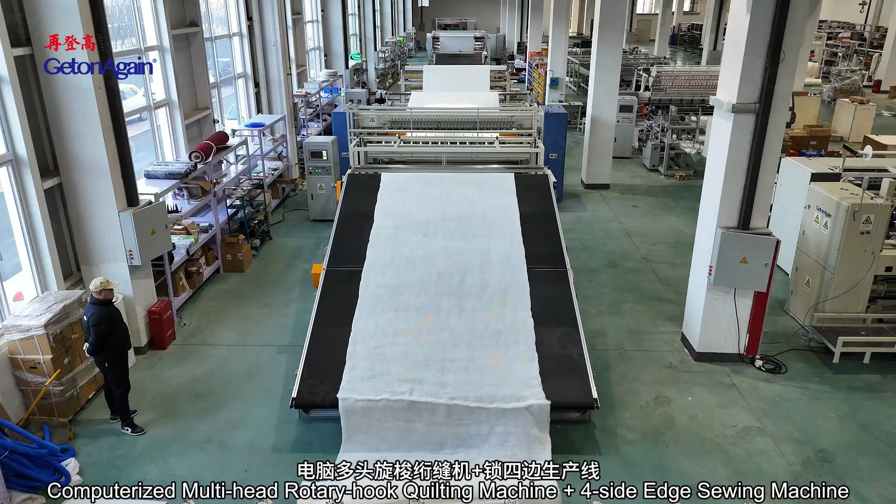Home textile comb cotton production line: computerized multi-head rotary hook quilting machine and 4-side edge sewing machine, capable of quilting patterns in various sizes without changing needle positions, greatly enhancing operational efficiency.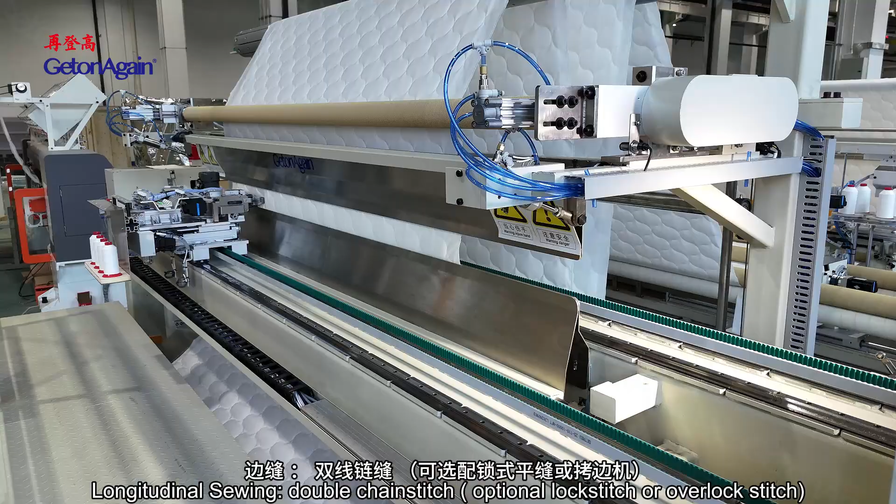Double row machine with lower needle row can move half of the head distance in the X direction, creating combination patterns of different sizes when coordinated with the upper needles. Longitudinal sewing uses double chain stitch, optional lock stitch or overlock stitch; transversal sewing uses multi-needle chain stitch. Transversal cutting occurs between the 4 stitches, cutting as per set length and feeding to the next sequence.

Bath towel horizontal sewing machine: a folding and sewing process for inelastic towels.

Pre-sewing auxiliary equipment includes automatic edge alignment, a relaxing machine, and air blowing. Roll fabric is mounted and folded into a flat fold state to achieve tension-free fabric placing. The wave-type air blowing device relaxes the fabric during the loosening process.

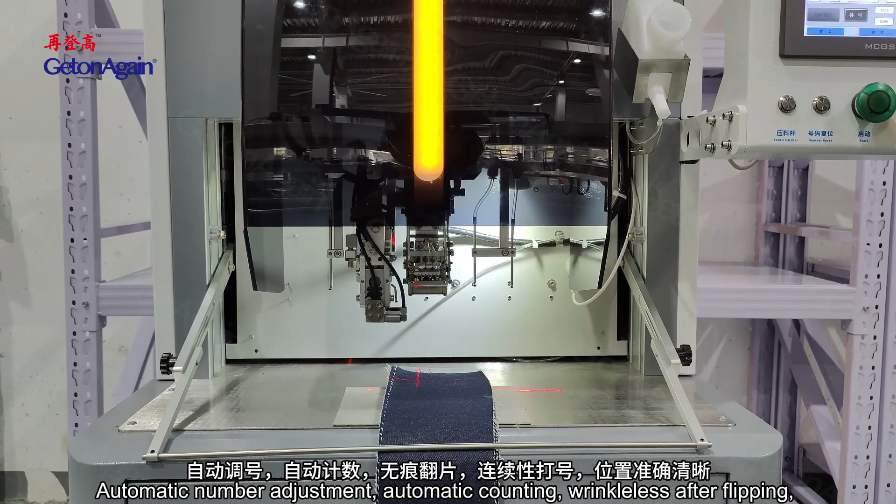Automatic marking machine: one-click start with intelligent grabbing, one person can operate 4 to 5 machines at the same time, reducing labor costs. Features automatic number adjustment, automatic counting, wrinkleless flipping, continuous numbering, and accurate, clear positioning. Used for cutting pieces for jeans, shirts, workwear, and down garments, etc.

High-frequency machine with built-in stepless heating system, adjustable temperature from 0 to 300 degrees, providing auxiliary heating to shorten processing time.

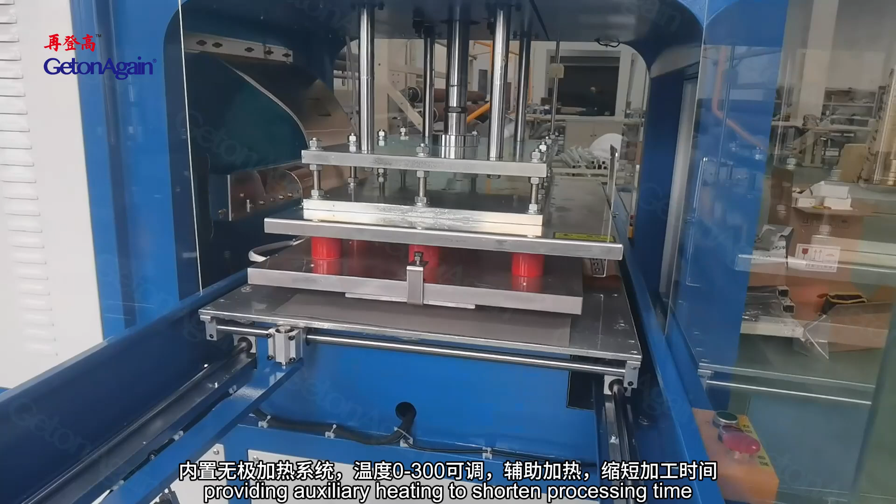Spark suppressor instantly cuts off current during sparking to prevent damage to molds and materials. Automatic overcurrent protection device protects electronic tubes and molds, extending their service life. Used for embossing and stamping car and motorcycle foot mats, blister packaging, plastic heat sealing, and leather embossing.

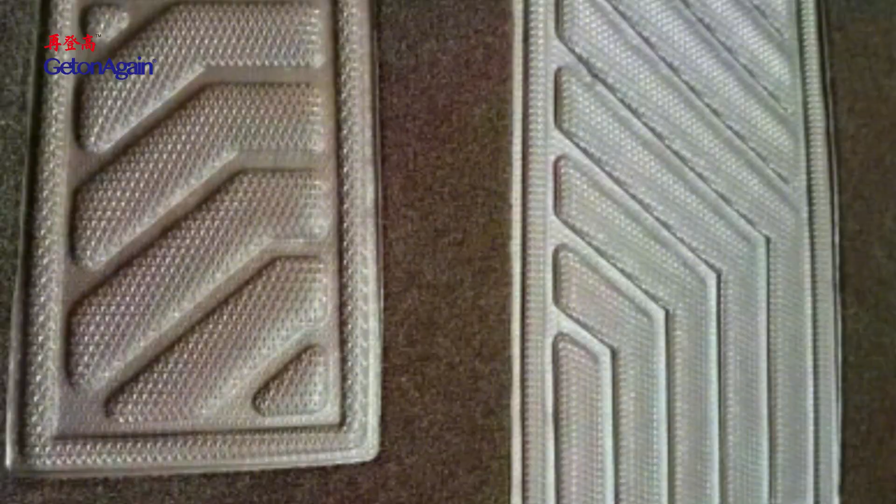Fully automatic winding machines. Post-finishing equipment includes a needle detector, applicable for large bulky products with ferromagnetic metal detection, for example bedding, etc. Working width can be adjusted between 1,200 to 4,000 millimeters according to customer setting.

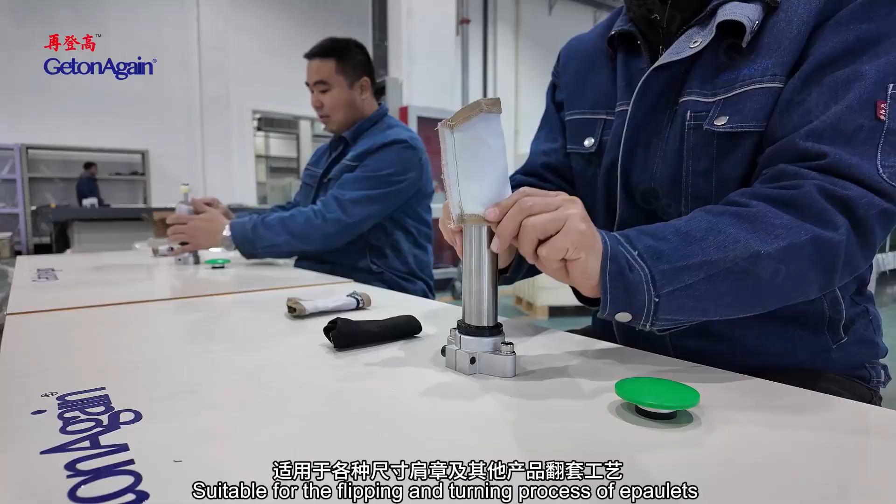Epaulet flipping machine replaces manual operation with high efficiency, safety and reliability, suitable for the flipping and turning process of epaulets or straps of various sizes and other products.

Automatic folding and packaging machine: economical, small floor space, simple operation, standard folding effects, automatic transferring to next station in GOA ZDB to stacking mode. Two working modes, bagging and folding, are adjustable. Both folding width and length are adjustable within a certain range, for T-shirt, polo shirt, hoodie, thermal wear, pants and lightweight jacket, etc.

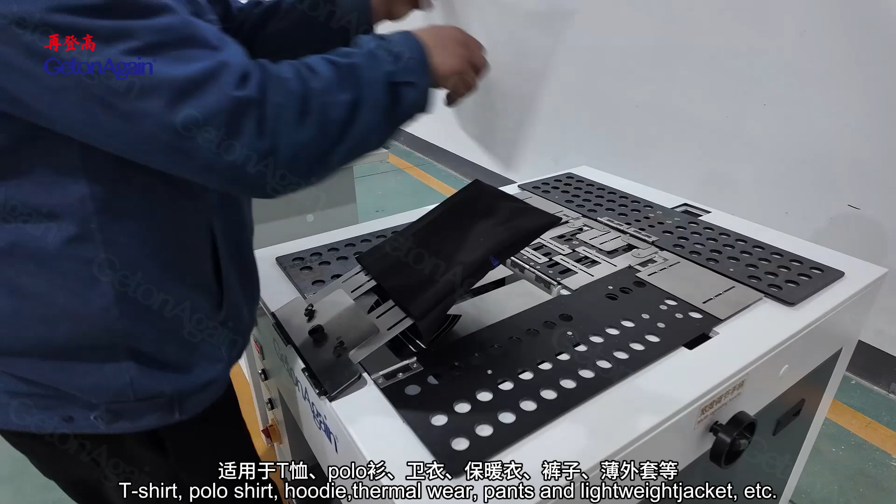Single and dual heads cap pressing machine for baseball caps. Steam time, cap clamping time, steam output, and air consumption can all be automatically adjusted. Built-in steam generator eliminates the need for an external boiler with automatic water supply, suitable for bulk order production needs. Using a robotic arm, it can automatically grip the cap. Simply place the cap on the mold to complete the pressing process.

Roll fiber panel cutting case filling line: edge trimming, length counting, cutting for polyfiber, thermal bonded wadding, chemical bonded wadding. Machine feature: unpowered material loader can pass bonded wadding to the panel cutter machine, equipped with bearings at both ends of each roller, labor saving and energy saving.

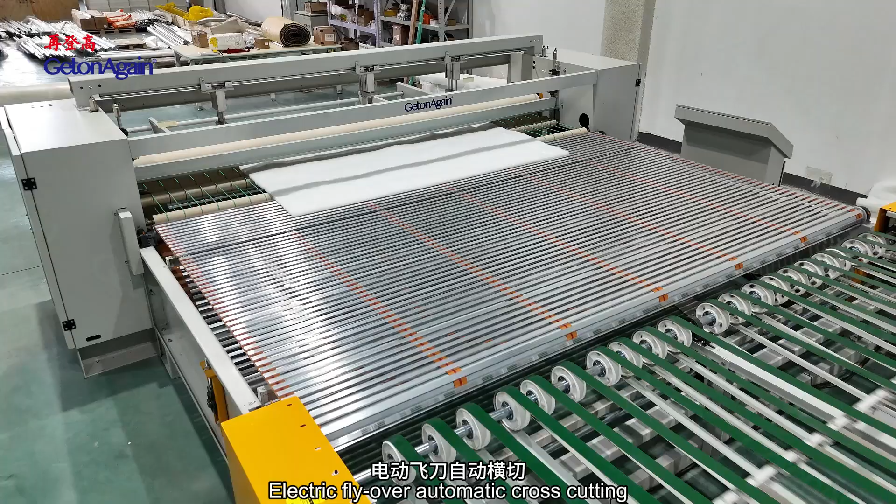Quilt roll packing machine, suitable for rolling and packing of fluffy items such as quilts, pillows, cushions, etc., to reduce volume and storage, as well as lower transportation cost. Packing item is auto-fed from backward to forward by the belt during the compressing process and rolled to pack into the bag.

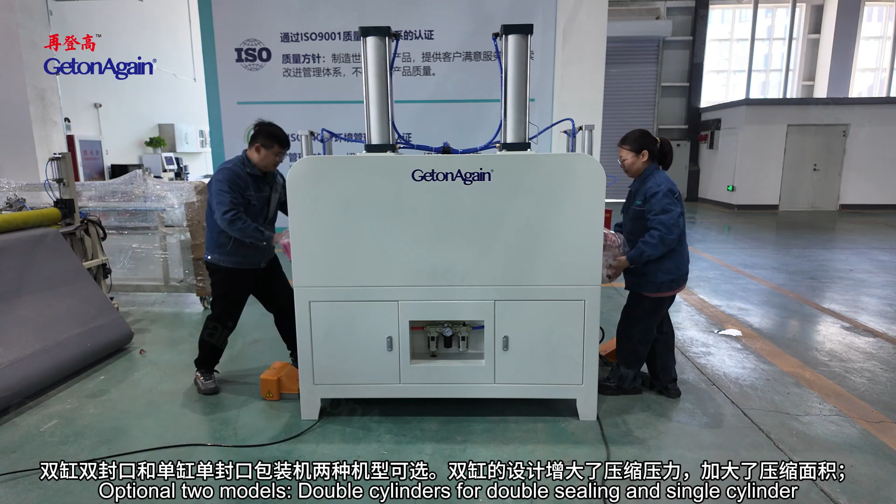Double cylinders, double operation, optional two models. Double cylinders for double sealing and single cylinder for single sealing. The double cylinder design increases the compression pressure and area. Double seal design: two workers operate two products at the side of the machine, greatly improving work efficiency, suitable for compressed packing of pillows, cushions, bedding, plush toys and other products.

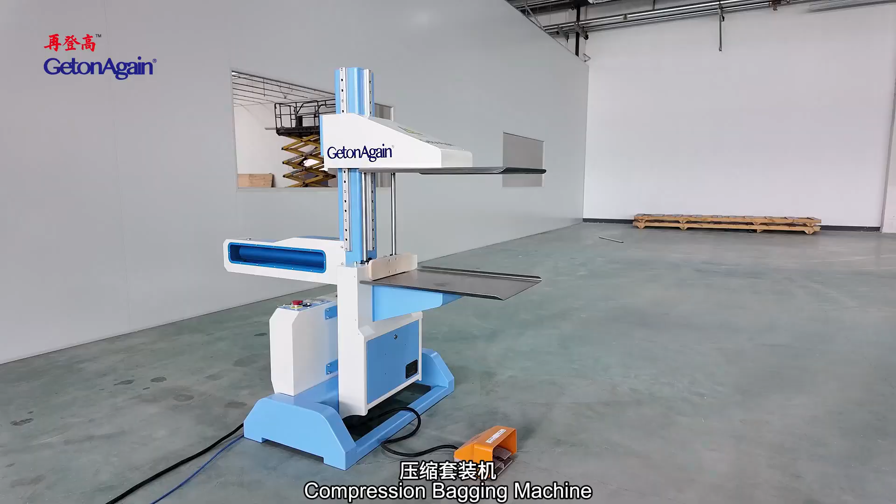Compression bagging machine: automatically compressing with an air cylinder, side pushing the product for bag packing, greatly improving work efficiency. The bagging is even, with electronic control program to ensure consistency of product. Specification: finished packed product is flat and nice looking, saving packing volume size. Compression stroke is adjustable to fulfill various sizes of packaging. Machine mold tools can be customized according to actual requirement, suitable for the compression bag packing of pillow, cushion, quilts, bedding, etc.

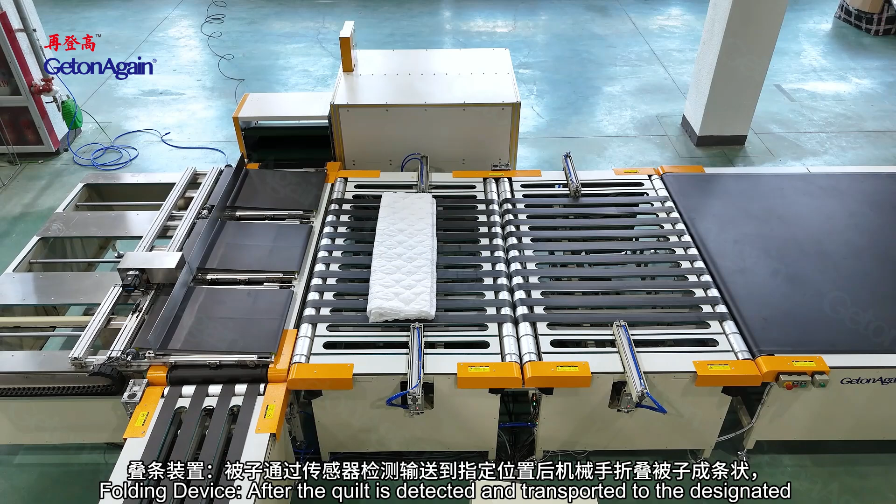Automatic folding and packaging machine. Equipment mainly composed of folding device, rolling device, stacking and compress plus conveyor device. Folding device: after the quilt is detected and transported to the designated position by sensors, a robotic arm folds the quilt into a strip shape. After being detected by sensors, the strip-shaped quilt is transported to the designated position and folded into a block shape by a robotic arm. Rolling device: the strip-shaped quilt is transported to the automatic rolling device to complete the rolling process.

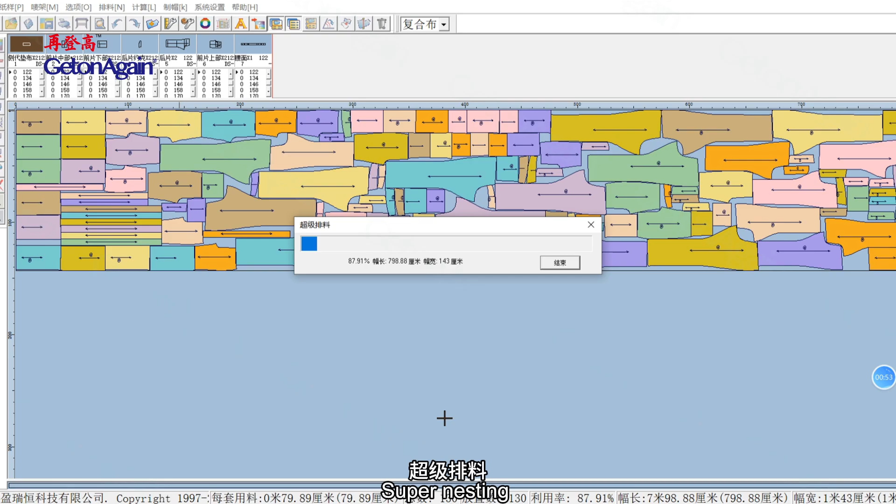Garment CAD includes garment CAD, super nesting, template CAD, intelligent tufting CAD, wire stitching CAD, perforation and embroidery CAD.

In addition, GetonAgain has developed a digital operation and management system for industries such as garment processing and machinery manufacturing. This system helps customers improve production efficiency and management levels. Its features can be summarized as the 4 ones: 1 industrial enterprise, 1 technology platform, 1 data standard, and 1 operating system. It is the optimal choice for enterprises to achieve digital transformation and intelligent upgrading.

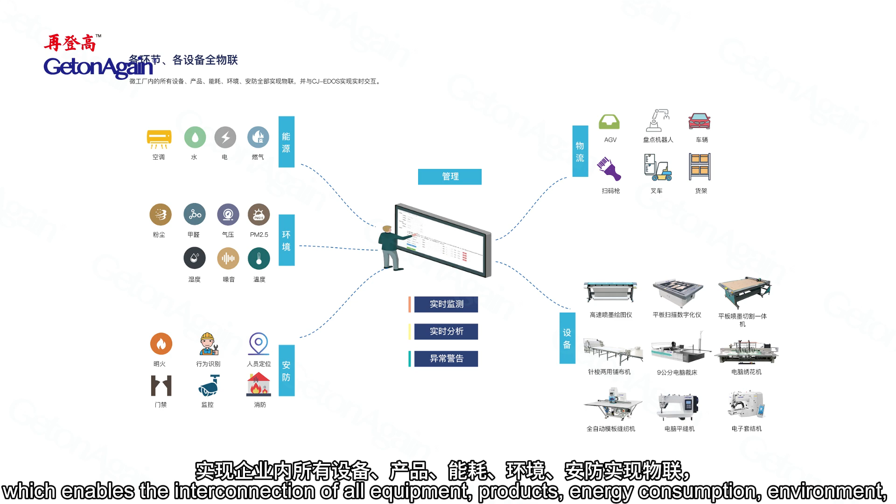Furthermore, by integrating Internet and IoT technologies, the company has developed an enterprise operating condition IoT management system, which enables the interconnection of all equipment, products, energy consumption, environment, and security within the enterprise. This system interacts seamlessly with the enterprise digital operation and management system, building a multifunctional integrated platform for enterprises. It enables functions such as data collection, real-time monitoring, data analysis, and remote management.